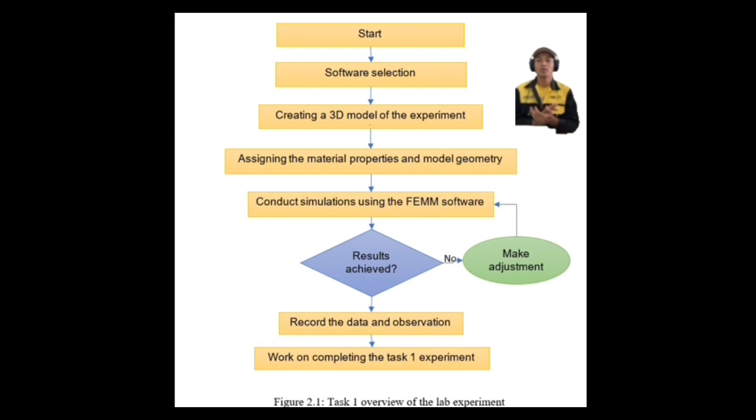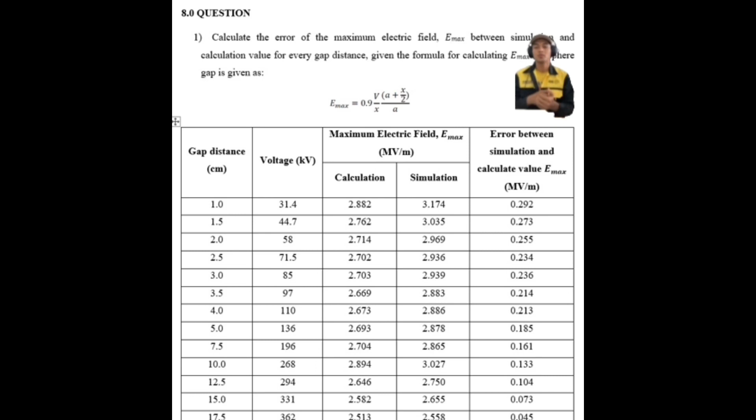And for question number 1, the calculation of error of the maximum electric field Emax between simulation and calculation for every gap distance. As we can see in the table, for every gap distance from 1 cm until 17.5 cm with different voltages, the error between simulation and calculation for the Emax value has been specified in the table below, from 0.292 until 0.045. So that's all for the simulation.

Next, using the Emax value from simulation, calculate the field utilization factor for all gap lengths using this formula. From the previous simulation values, we move into calculating the average electric field with the formula given, and then we apply both values to calculate the field utilization factor. We get, from a gap distance of 1 cm, a field utilization factor of 0.98, until the gap distance of 17.5 cm with a final field utilization factor of 0.80. So that concludes my report.

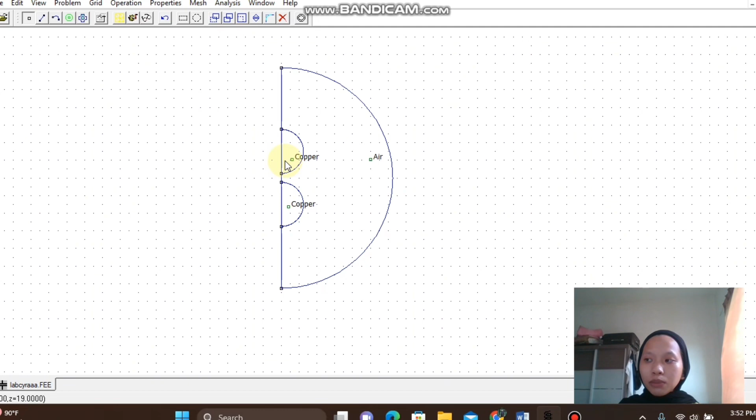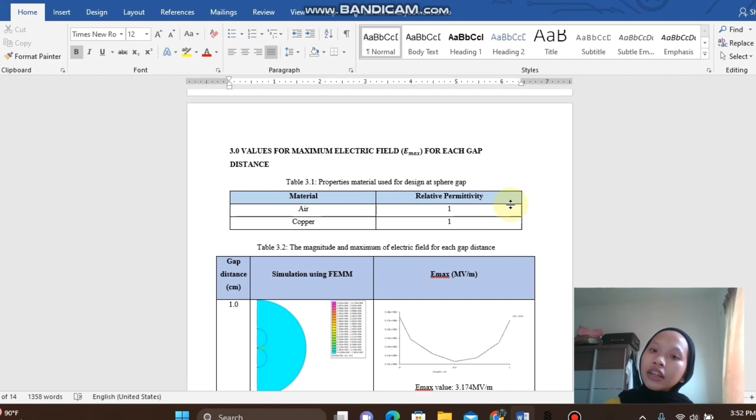So this slide demonstrates how we get our results for simulation using FEMM software for task 1, which is the analysis of electric field between electrodes. Basically, for this task, we use air and copper, where the relative permittivity is 1 for air and also 1 for copper. This is the gap distance that has been stated in our lab report, which is 1, 1.5, 2, 2.5 until 17.5.

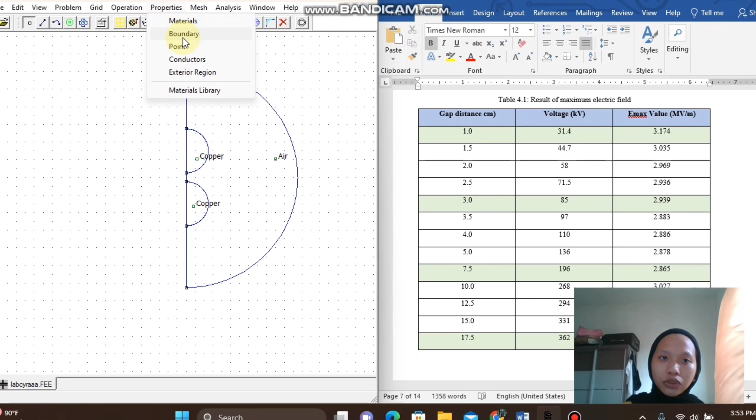So we can change the boundary. For this, the boundary H1 until H13, which is the gap distance 1 until 17.5, and the copper on the upside is the ground. We set it to the ground, and for this we set it to the gap distance. Here I show the gap distance of 10 cm. So after we have done the drawing, we mesh.

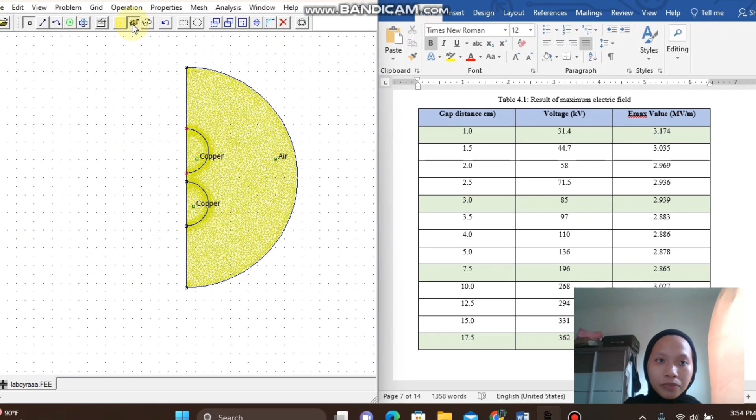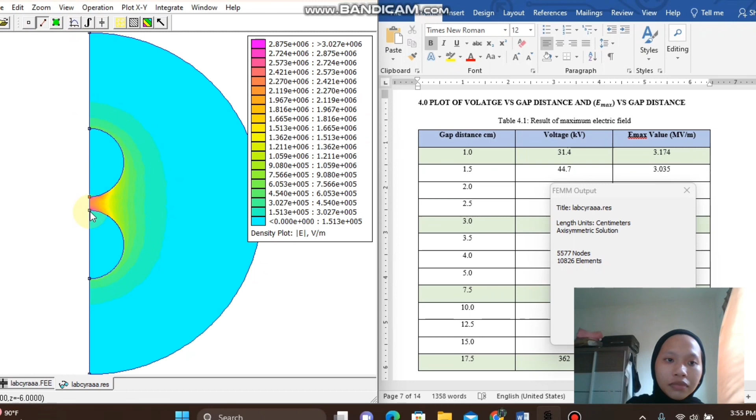So this is the value of the Emax value. We need to set to the field intensity. And then this is the gap. Also set to the magnitude of the field density. So this is the graph that we get.

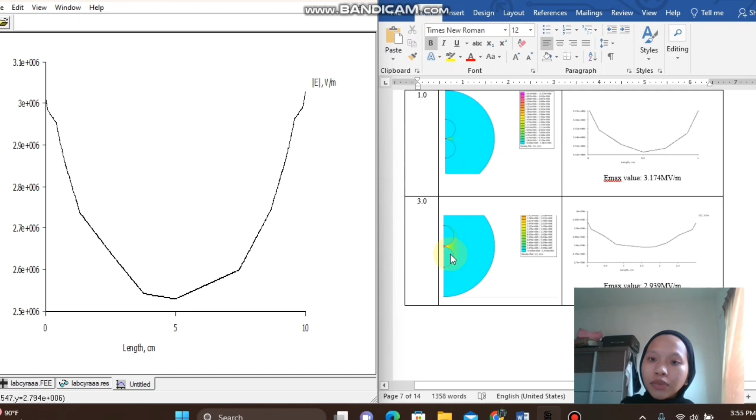So here we show the simulation for gap distance for 1 cm, 3 cm, 7.5 cm, and lastly for 17.5 cm. So this is the Emax value that we get from our simulation.

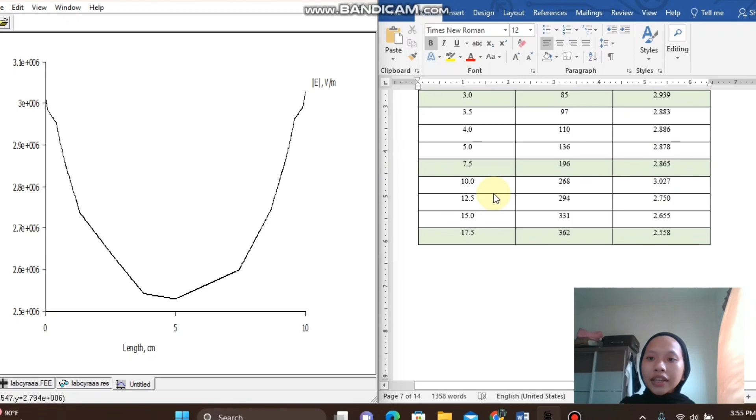Assalamualaikum warahmatullahi wabarakatuh. For task 2, which is the analysis of force of a gapped C-I core. The background of the study: the magnetic field is the area where magnetism's force operates on a magnetic substance or a moving electric charge. A gapped C-I core is a magnetic core that is commonly used in transformers and inductors. It is made up of a C-shaped iron core with a gap in the magnetic path.

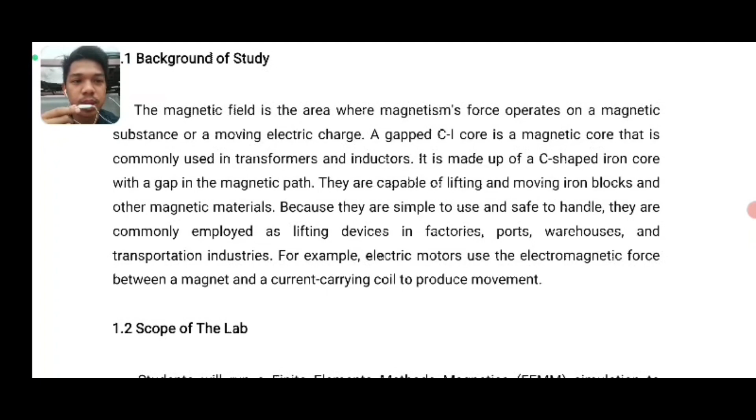They are capable of lifting and moving iron blocks and other magnetic materials because they are simple to use and safe to handle. They are commonly employed as lifting devices in factories, ports, warehouses, and transportation industries. For example, electric motors use the electromagnetic force between a magnet and a current carrying coil to produce movement.

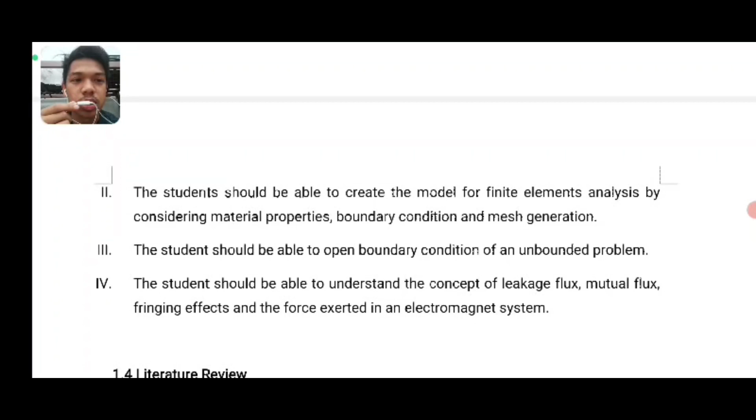For objectives, first, understand the concept of electrical field in electrostatic problems. Second, able to create the model for finite element analysis by considering material properties, boundary condition, and mesh generation. Third, able to open boundary condition of an unbounded problem. Lastly, able to understand the concept of leakage flux, mutual flux, fringe effect, and the force exerted in electromagnetic system.

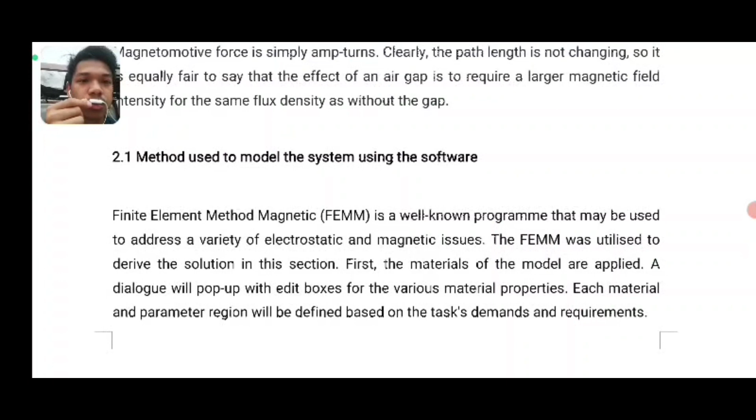For methodology, the method used to model the system using the software is FEMM, which is Finite Element Method Magnetics, a well-known program that may be used to address a variety of electrostatic and magnetic issues. FEMM was utilized to derive the solution in this section.

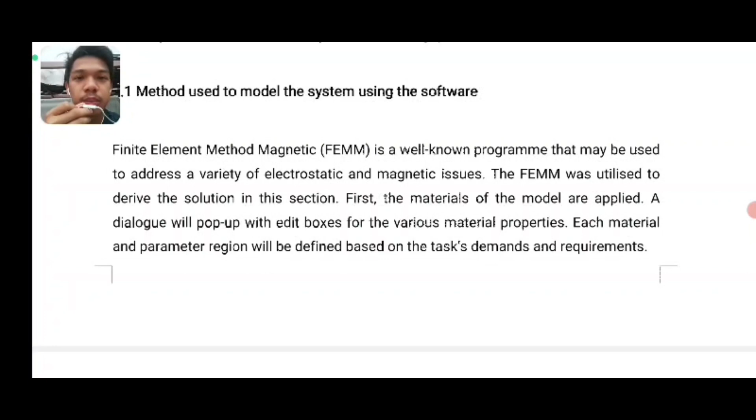First, the materials of the model are applied. A dialog will pop up with edit boxes for the various material properties. Each material and parameter region will be defined based on the task demands and requirements. After all the requirements have been assigned, the file is saved and run using the mesh generator. The parameters can be viewed in the post-processing window by clicking on the density plot tool. For that reason, FEMM may be a suitable option for analyzing the force of a gapped C-I core.

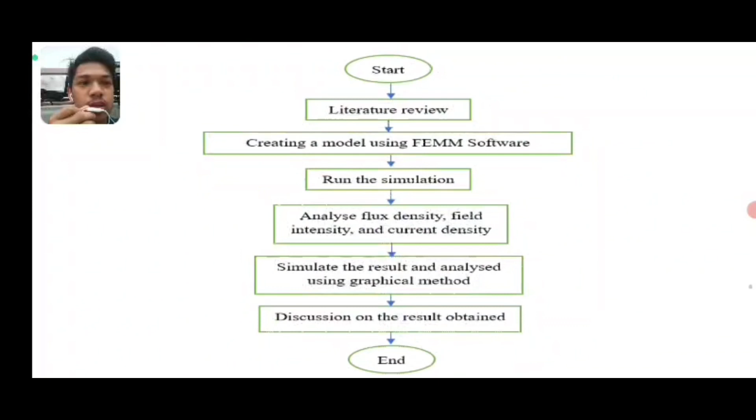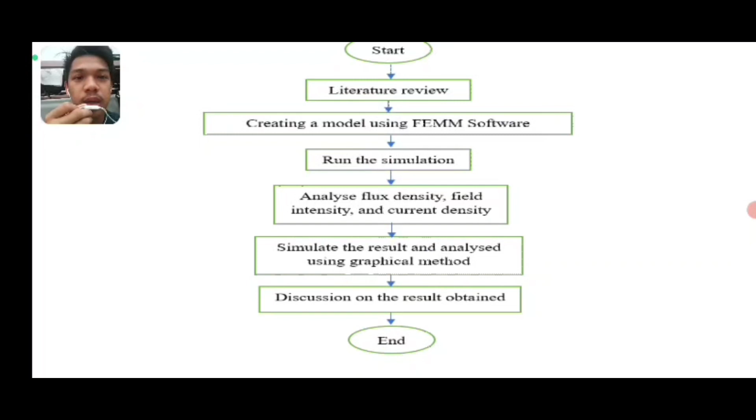So this is the flowchart of task 2, which first starts with the literature review, then creating a model using FEMM software, then run the simulation, analyze the flux density, field intensity, and current density, simulate the result and analyze using graphical method, and lastly discussion on the result obtained.

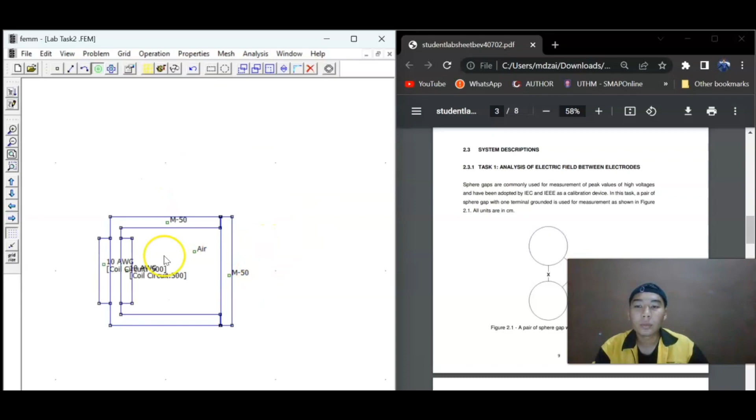And today I'm going to explain about task 2, which is the analysis of force of a gapped C-I core. So for the value of exerted force right here, the X component is equal to negative 145.087 N, while the Y component is negative 0.0159492 N. So for the first one, we need to do it right here, with the same parameters given as in the lab sheet here, with the 10 AWG cable with 500 turns and 50 A, and also the M50 steel.

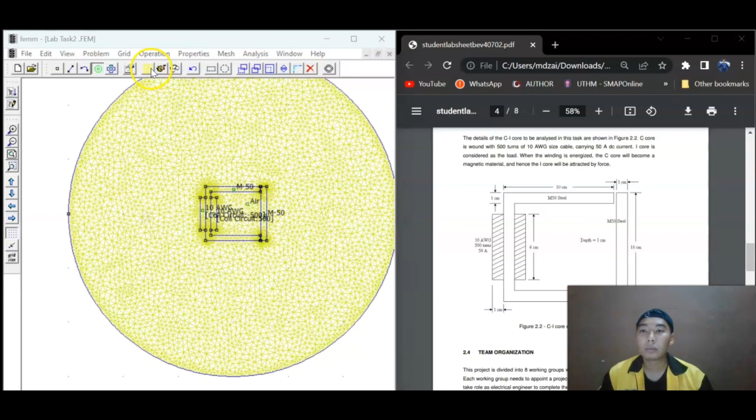Okay, next we are going to run this right here. Mesh it. You can see right here the result from the mesh. So as you can see the FEMM output right here, and we are going to go for the flux density. So just show the density plot right here. Then you can see right here.

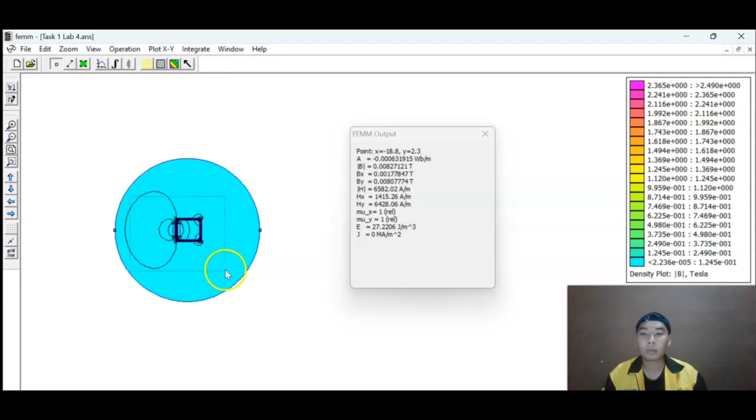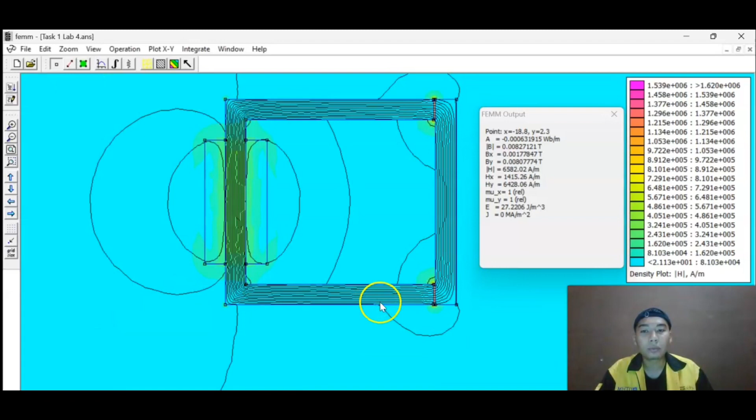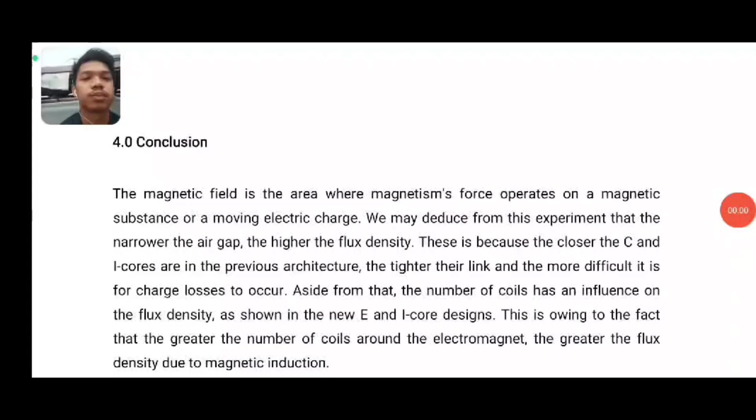Right, for the conclusion, the magnetic field is the area where magnetism force operates on a magnetic substance or moving electric charge. It may be deduced from this experiment that the narrower the air gap, the higher the flux density. This is because the closer the C and I cores are, the tighter their link, and the more difficult it is for losses to occur.

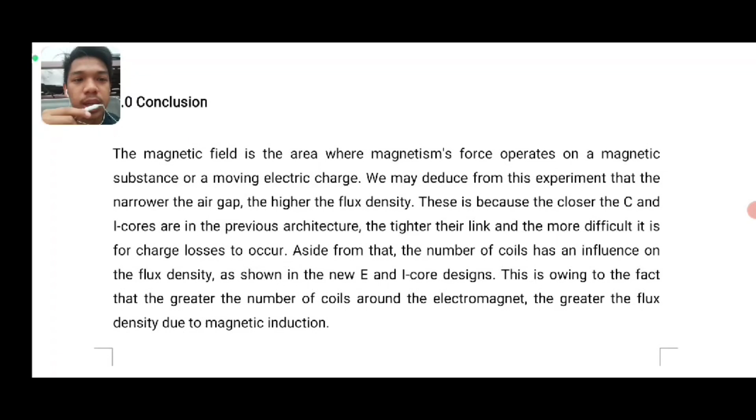Aside from that, the number of coils has an influence on the flux density. This is owing to the fact that the greater the number of coils around the electromagnet, the greater the flux density due to the magnetic induction.